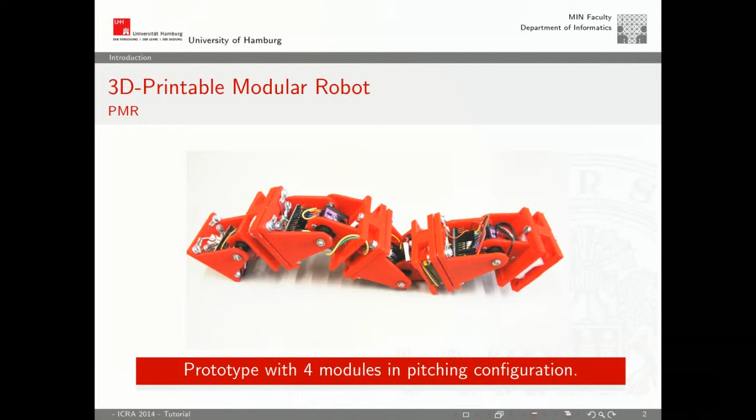Design of a modular robot that consists mostly of standard components and printable housing parts. The advantage of using printable housing designs is that you can integrate everything you need, as you need it. For instance, we integrated slots where our control boards perfectly fit. If you want to change something, you can change it in your 3D model and print a new one. One printout of a housing part is very cheap, so you don't have to worry about small changes, and it's also quite fast and available to you—you can directly check your idea after changing them.

Our main design concept was to create it with as little cost as possible, because the main idea was only to build something for myself, and so it had to be affordable for students.

Since my colleague Florens Wasserfall was working on slicing algorithms for FDM 3D printers, I had the idea to start designing a housing for a modular robot, because the general structure of these housings is very simple, and so I tried to design something with a CAD program.

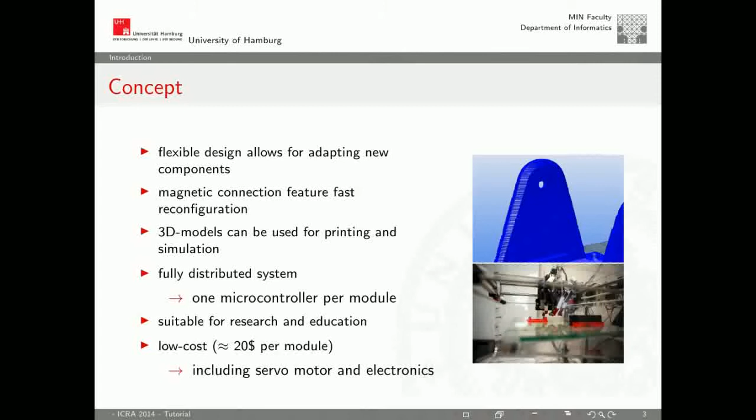The key is that if you design your housings on your own, you can easily change them to adapt to new components. One of the main parts of the housing holds, for example, the control board. It fits perfectly into some slots prepared for it, and in this way we don't need any further mounting devices. Of course, if you change the control board, you could also change the design of the slots designed for it.

We decided to use magnetic connections at the interfaces of the robot. Neodymium magnets are quite powerful. You can put a fair amount of weight on it, and it's no problem for the robot to compensate for this. So we designed something that is manually reconfigurable, and you don't have to worry about how to disassemble it or reconfigure it.

This proceeds in the software, because we created an autonomous detection of the topology of the whole robot. But I'll tell you about that later in detail.

One of the most important features is that you can use the 3D models you need for printing with the 3D printer in a simulation. My diploma thesis was related to modular robot simulation and locomotion generation, especially the optimization of locomotion control parameters. And we implemented this robot as a completely distributed system. Every module has its own microcontroller, so distributed algorithms could also be used in this way, like CPGs for instance.

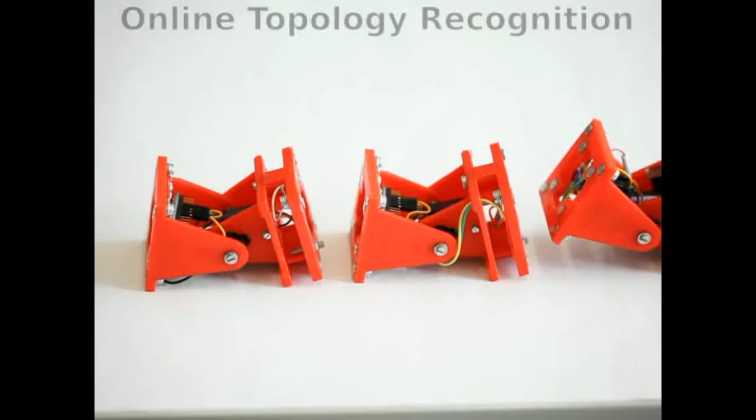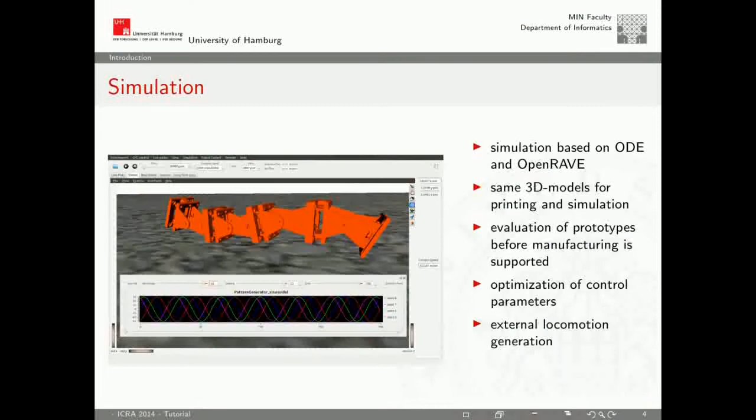Once you have finished your design of the robot, you can reuse the housing 3D files for a simulation. The simulation system allows for optimizing the locomotion modes. Over time, we created several versions of the housing to react to design failures.

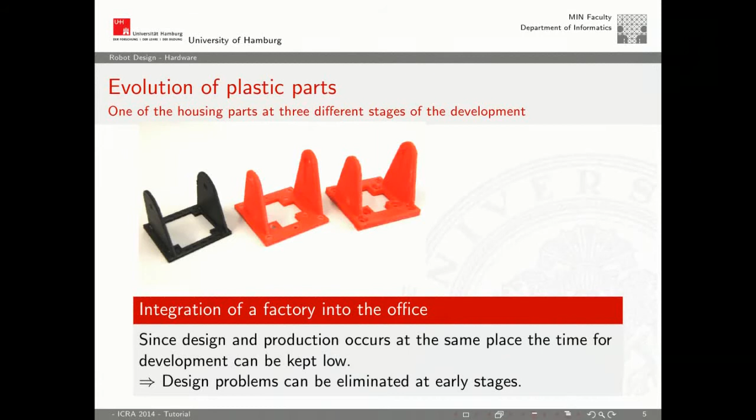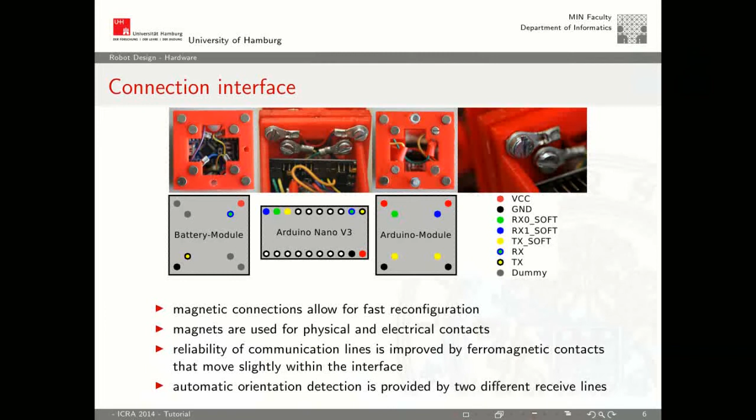One very difficult part was to connect the wires at the magnets. Of course, we can't use heat, and we did not have some kind of conductive glue. So we had to think about something more tricky.

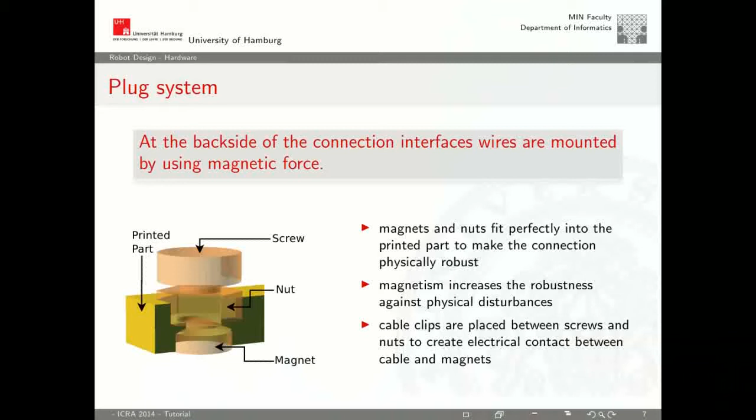As you can see in the slide, there's a hole for the magnet that inhibits the magnet from being pushed totally into the plastic material. Then there's a slot that fits a nut. Into the nut you can put a screw, and between the head of the screw and the nut you can place some wiring.

Cable clips are the appropriate choice to connect cables. The hole of the cable clip is used to put the screw inside, and then you can screw it into the nut, and in this way you get a kind of a plug.

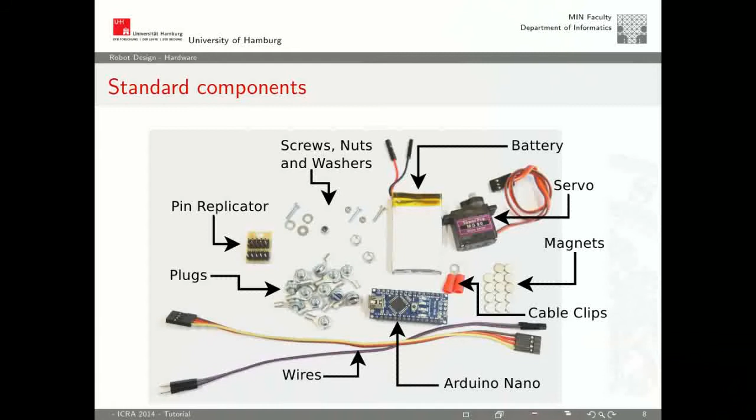Here you can see all of the components, or mostly all of the components, we used to assemble one robot. We have three different levels of control.

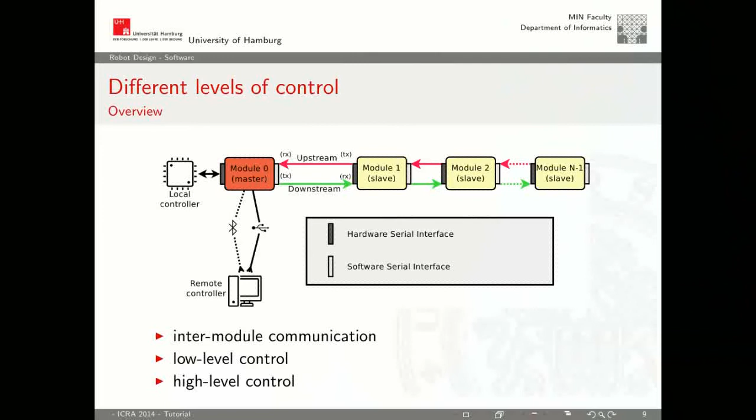The inter-module communication is used for some automatic communication between the modules. Autonomously, the topology is detected all the time the robot is running, and it also recognizes changes by sending heartbeat signals to the neighbors. If one neighbor doesn't answer anymore, then we know it's not connected, and because we have a point-to-point connection and not a bus, we know that its siblings are not connected anymore either.

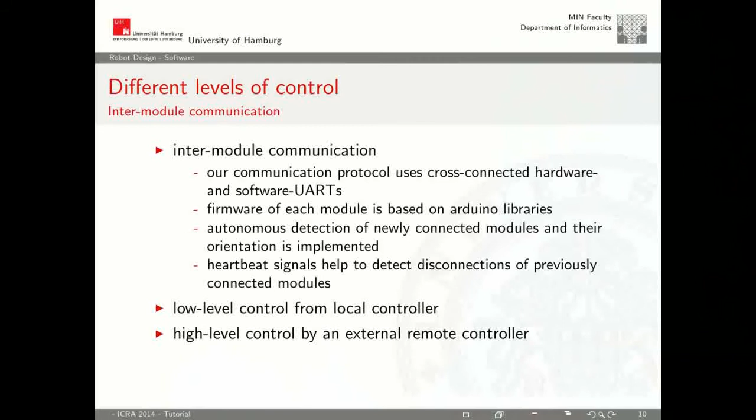So we can change the configuration, or the stored topology, in the master module according to this. The module that lost connection tries again to connect if it still works. So if we only had a small disturbance, then it's not a problem, because we can establish the connection again.

Low-level commands are used to create locomotion. There are some commands like set angle, used to move the servo motor of a single module. This is the basis for locomotion generation of the master module, but also of some external or local controllers that can be added in a payload slot of one module. It allows for implementing several control locomotion algorithms.

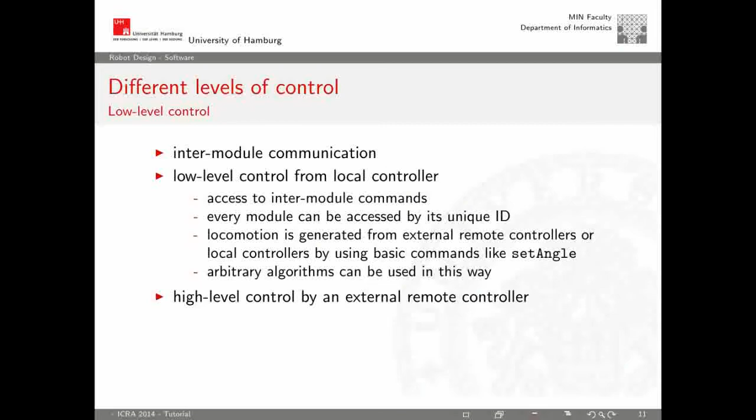Then the high-level control can be used to start some stored procedures in a master or maybe a local controller. Since communication is done with a master controller via USB or Bluetooth interface, you can bootstrap some new locomotion modes by sending high-level commands.

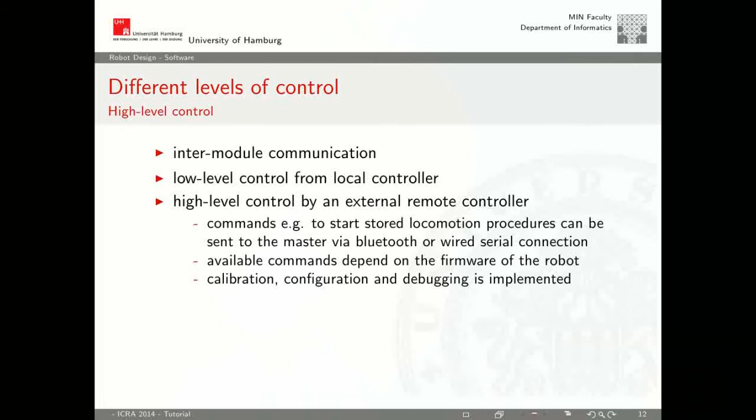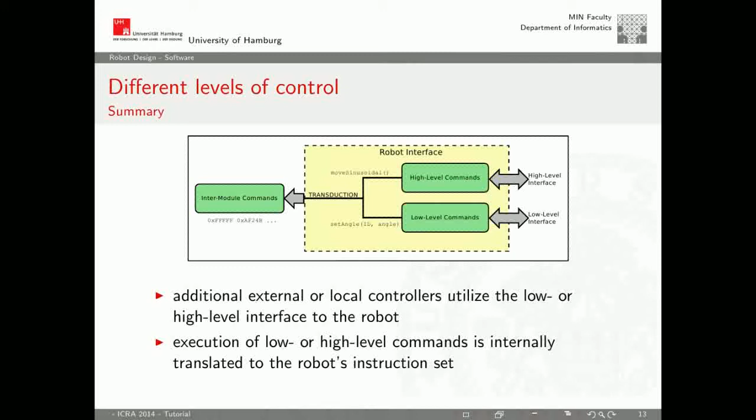These are transduced into the inter-module communication, which is based on communication of chars.

What we've done so far is to create an experimental low-cost modular robot platform in hardware and software. We designed the housings, created the software based on some Arduino libraries, and realized a magnetic connection interface for power supply and communication. The communication protocol was based on a UART, which was a kind of experimental feature.

Maybe next time we could utilize the I2C protocol to use a real bus, because it would be helpful when using many more modules, since the point-to-point interface has the drawback of a high load on the bus if you use many modules.

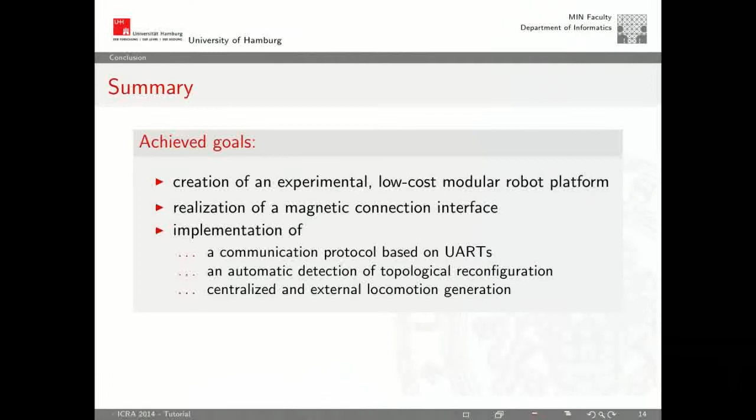As future work, we are eager to know how the distributed locomotion generation works, because this would dramatically reduce load on the bus, and so it should perform very well on a point-to-point based interface.

Then we think about how to integrate sensors, or which sensors could be most useful or interesting to integrate, because there are also a lot of low-cost sensor breakout boards out there. For instance, IMUs, or simple switches for checking if contact to the ground is established.

Another thing would be to create other modules, to create some heterogeneous structures. For instance, some rotating module that allows for dynamically and autonomously changing the orientation from pitching to yawing without manual reconfiguration.